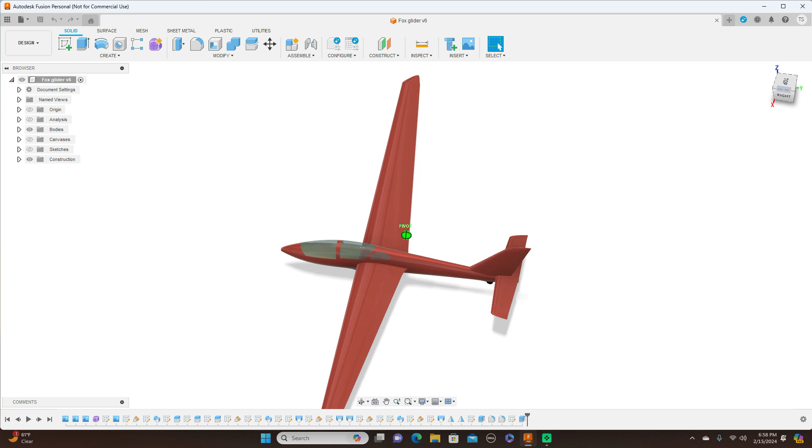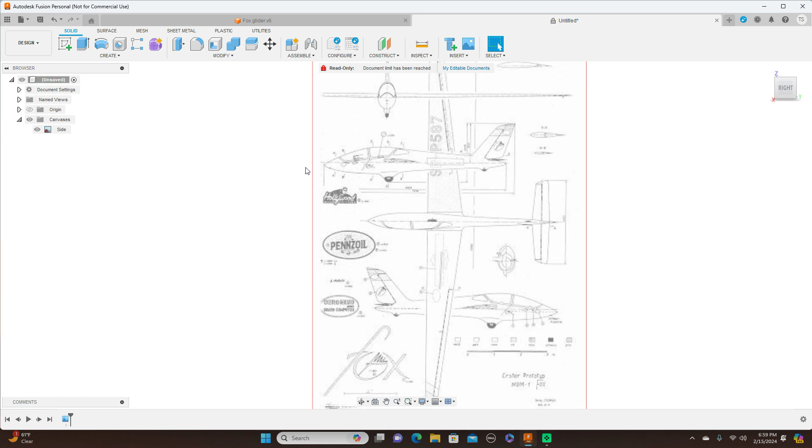And here we have it, Fox glider. Open, put it on this plane here, drag this out. And we have this. Come up here to canvases, change this to side. All right. Now I'm going to calibrate this, the side view. I want from here to here 2 meters. So we'll click here and click this line and type in 2000.

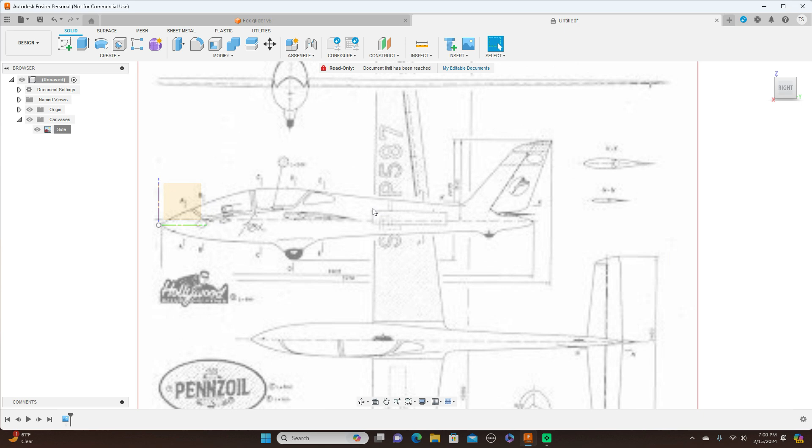Scroll in. Now I need to line this up with the origin. Turn on origin, left click, then right click, and edit canvas. And OK. Do the same thing and insert a top. So canvas.

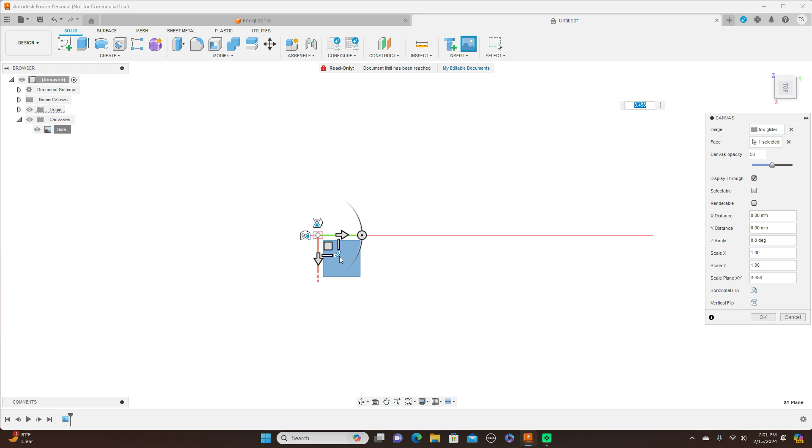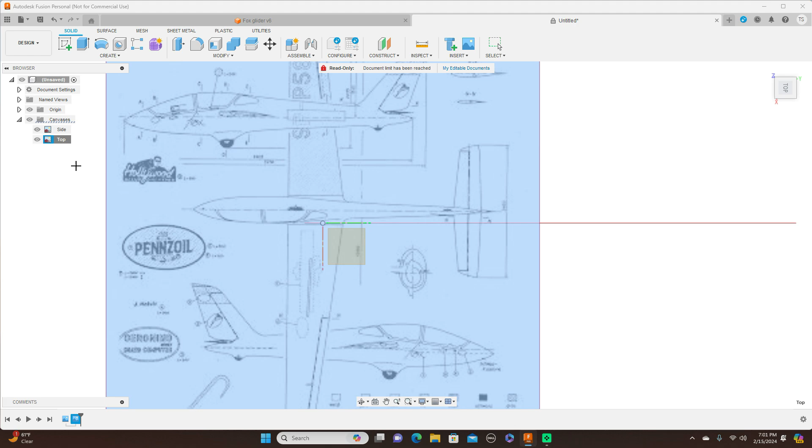Now I want to put this on this plane. Drag this out. And rotate this 90 degrees. And OK. And change this to top. Left click, then right click. I want to calibrate this. And same thing on this. From here to here, 2000 millimeters. Then we need to edit canvas and move this back.

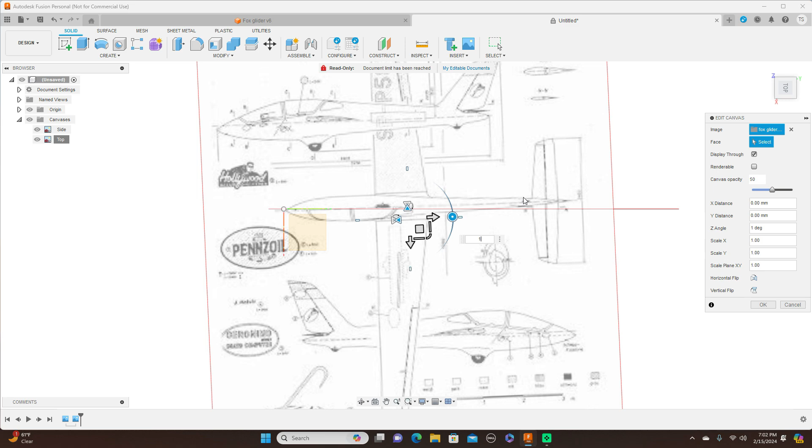Now this is slightly off here, rotation. So I'm going to add just 1 degree. Still slightly off. So let's add 1/2 degree. Well, still not right, but I'll get it here in a second. Okay, that's better. And click OK.

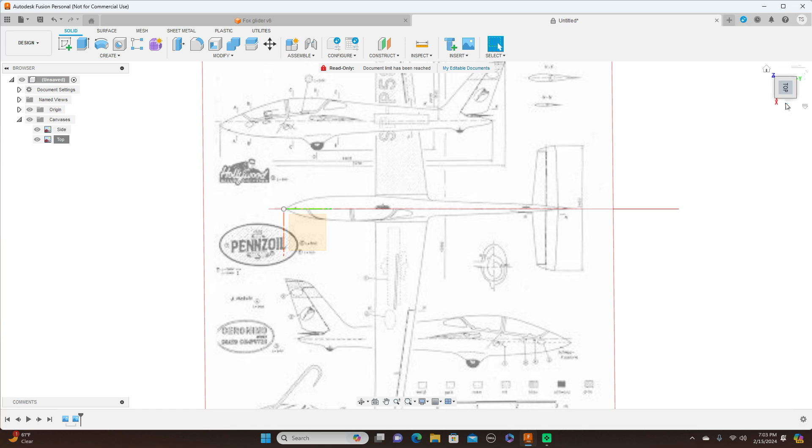Now we have the side and the top. Now we need a front view. Same thing, come over to Insert, Canvas. Open this. And we want this on the front. Drag this out. Now this is facing the wrong way, so I'm just going to hit this button right here. And click OK. Again, we want this front down here, but first need to calibrate this to the correct size.

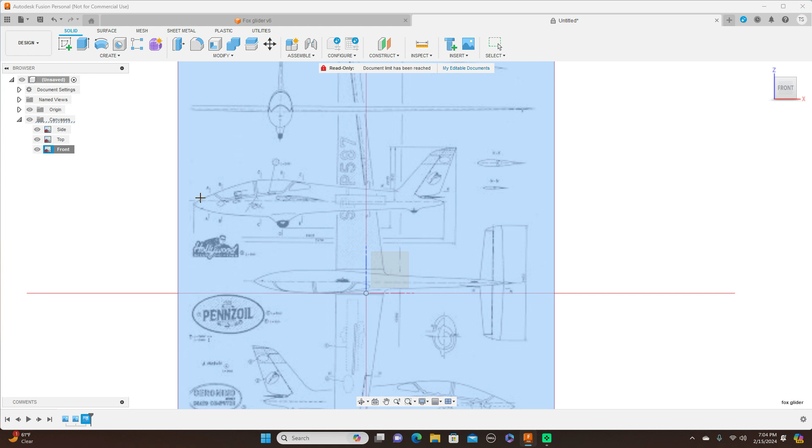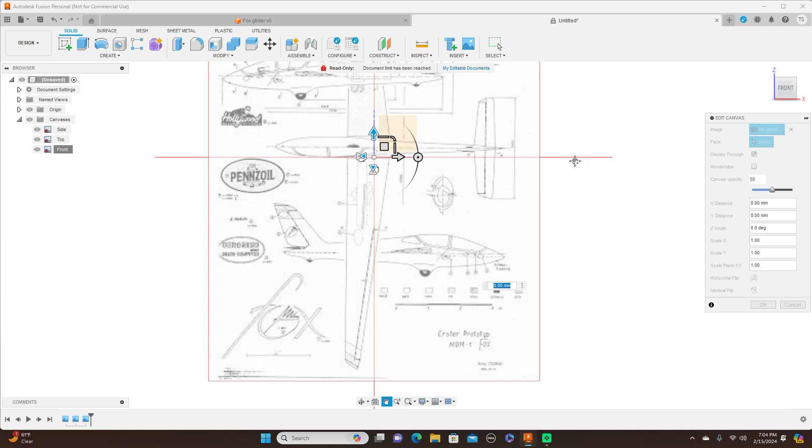So this here, change this to front. Right click on it and calibrate. And again, here, 2000. Or you can add whatever length you want yours to be. Now, right click on that and edit canvas. And move this down to here. Click OK.

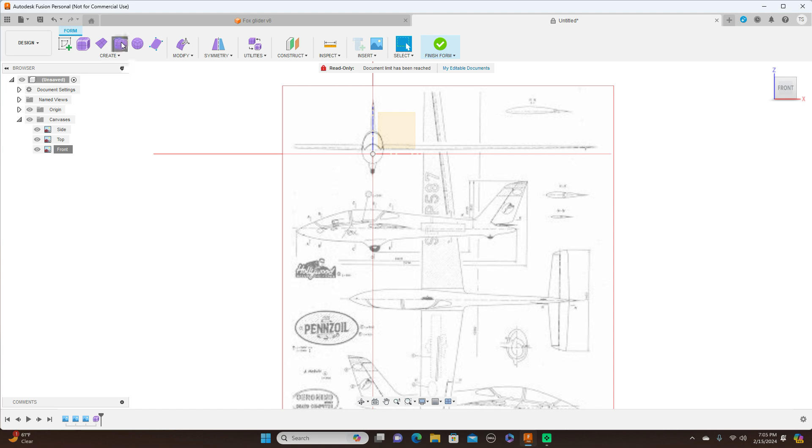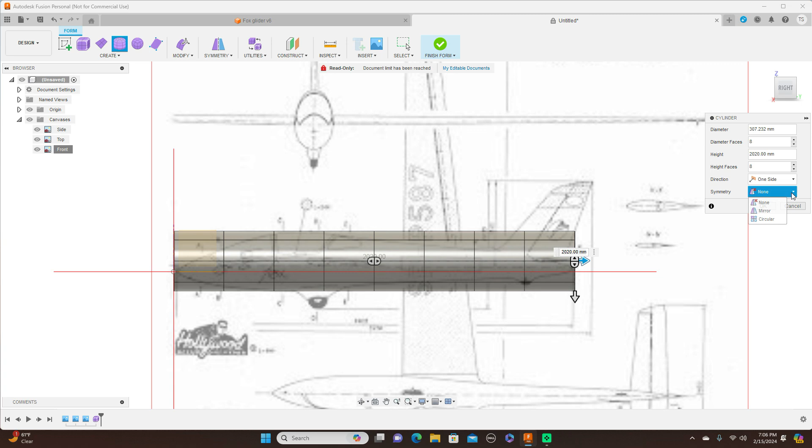Come up here to create form. Click this. And we want a cylinder. And we want this on this plane here. Drag this all the way back. Add height faces. Going with 8. And I'm going to mirror this with symmetry and click OK.

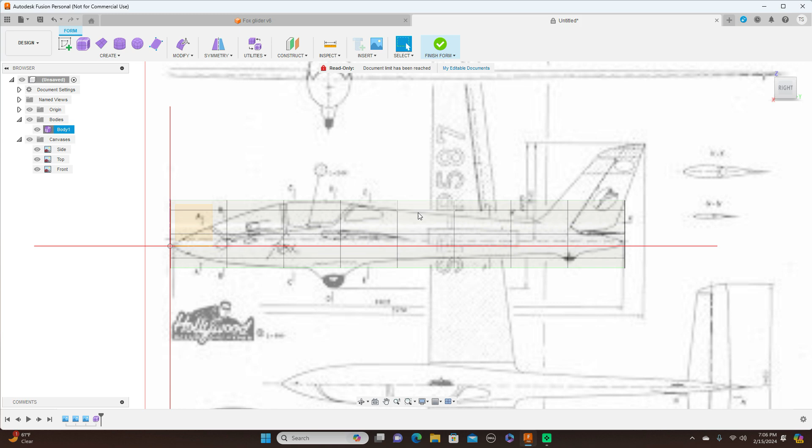Now it's hard to see through this, so what I'm going to do here, right click and the opacity control, move this down to 50%. Now we can see through there much better. I'm just scaling these down to these 2 lines here. Bring the opacity up a little. Go ahead and finish this.

And come back down here, right click and edit. And continue.

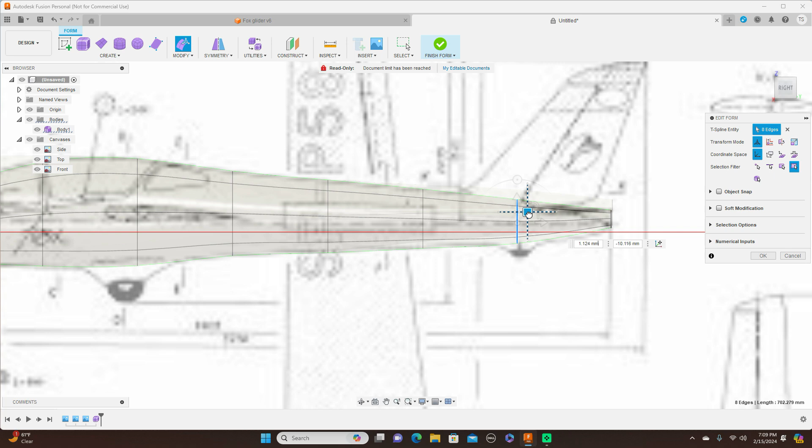Make this bigger. Drag this down. And drag this down too. Bring that down. Now over the top.

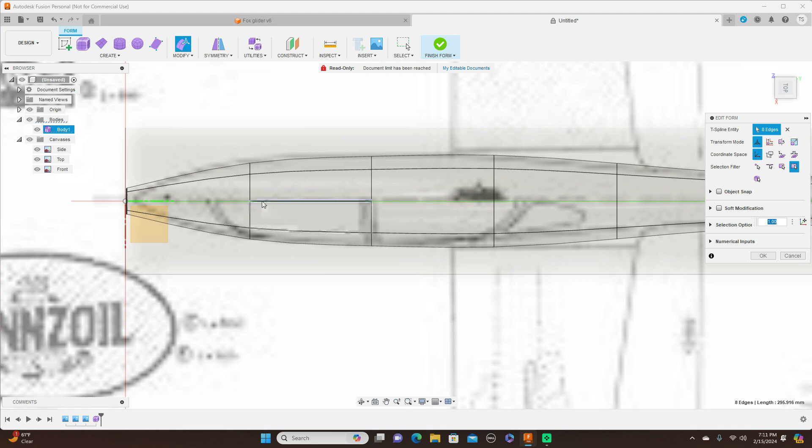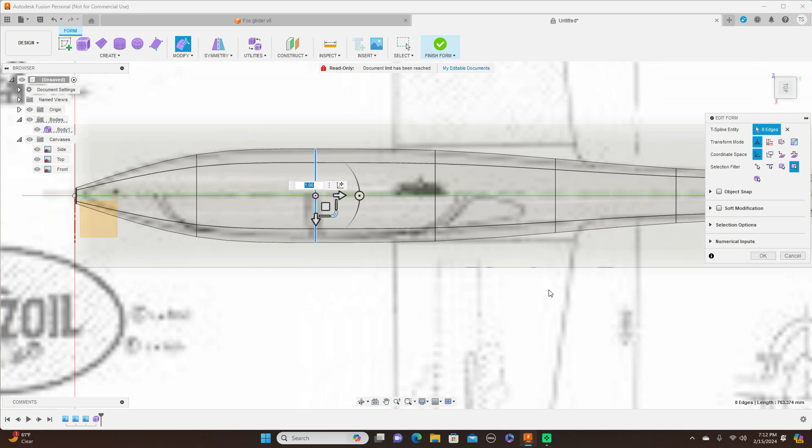And this is looking pretty good so far. Side view, let's take a look at the front. And this is matching up pretty well. And click OK. Finish form. And let's see what we have so far.

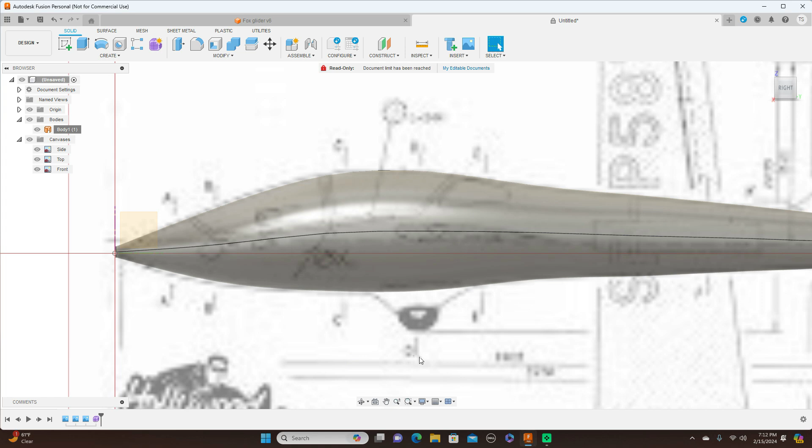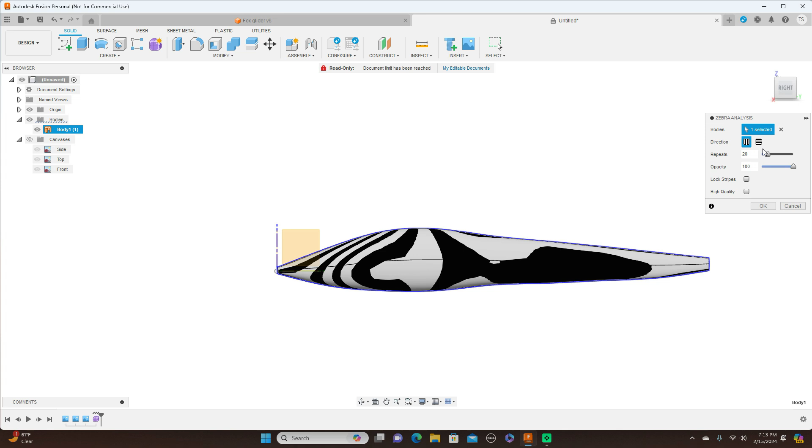And bring the opacity level back up to 100%. Turn the canvases off. Okay, here's our shape. And it's got, looks like some lumps in here. Let's see here. So thick here. Okay. Right through here, so that's a little thick.

Turn this off and correct this.

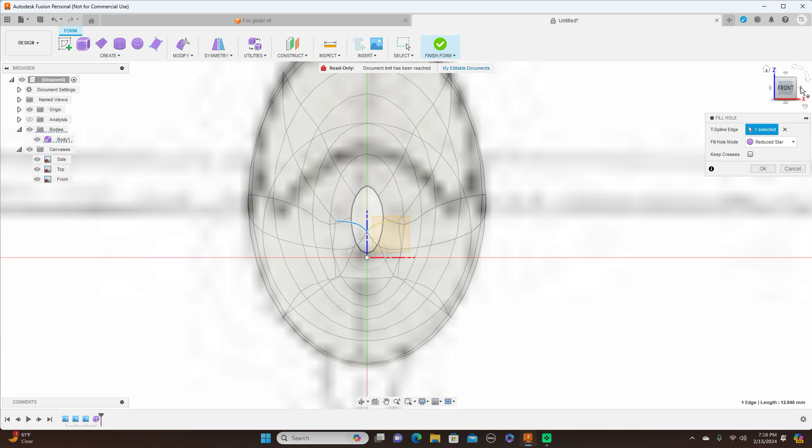Okay. Finish form. And that's our fuselage. Let me do something here. Come back down here, right click, edit. And what I want to do is close this nose up here. So I come up here to modify, fill hole. Double click that. See what it looks from the side. And there we have that. And click OK.

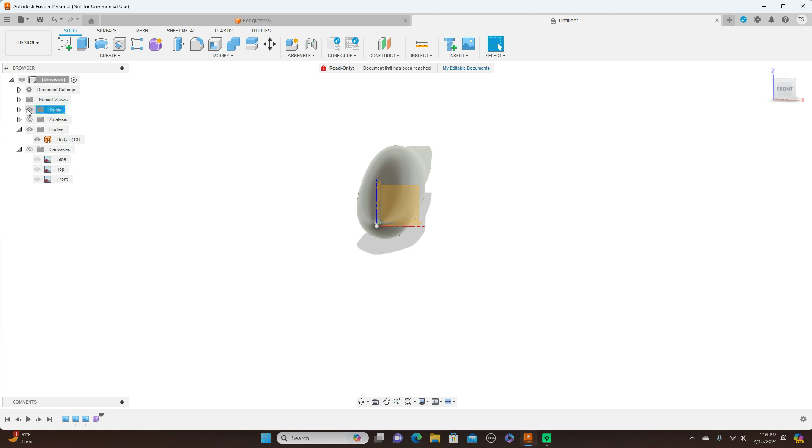Go ahead and finish form. Turn the lines off. And turn the canvases off. And there's our fuselage.

Okay, now we're going to make this section right here down here. So, turn my lines back on. Edit this. And I want to add a line. Come up here to modify, insert edge. I want to move that to right there. Come over here, exact, and OK. And I'm going to add another 2 lines.

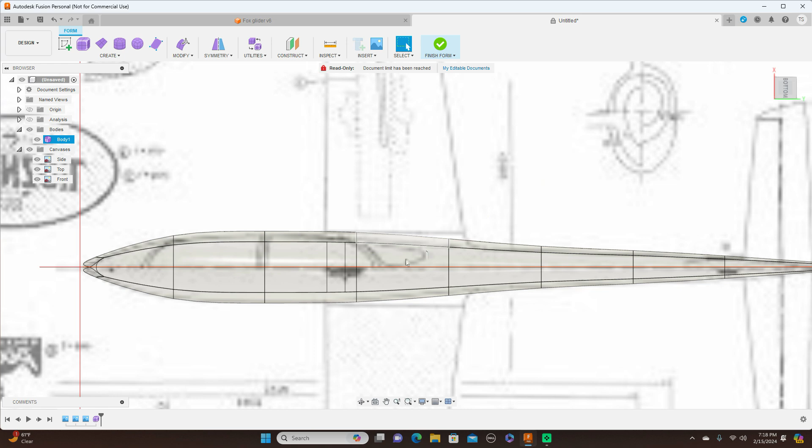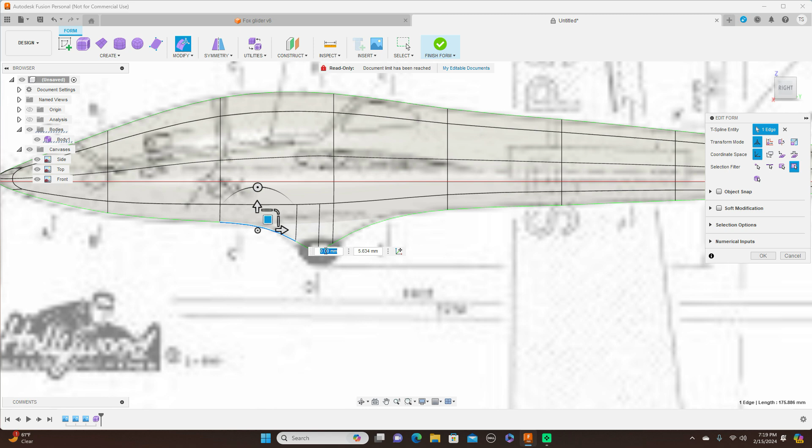Right about there. Click OK. Pull this down. Click OK. This point here. Move this back up. This down. And move this up. OK. Click OK. Finish form. You turn off the canvas. And there we have that.

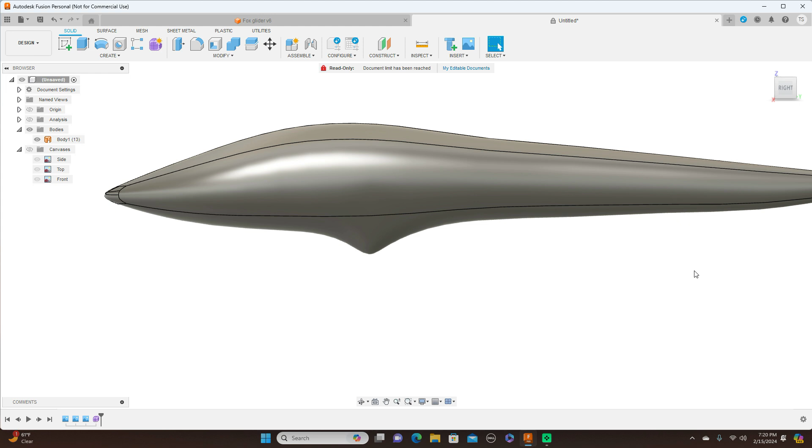Now I'm going through this pretty quick because this is not a hard airplane to model, but I wanted to do this before I get into any more complicated stuff that I'm going to show on my channel, so that you guys can practice doing this simple stuff and getting the forms correct and everything.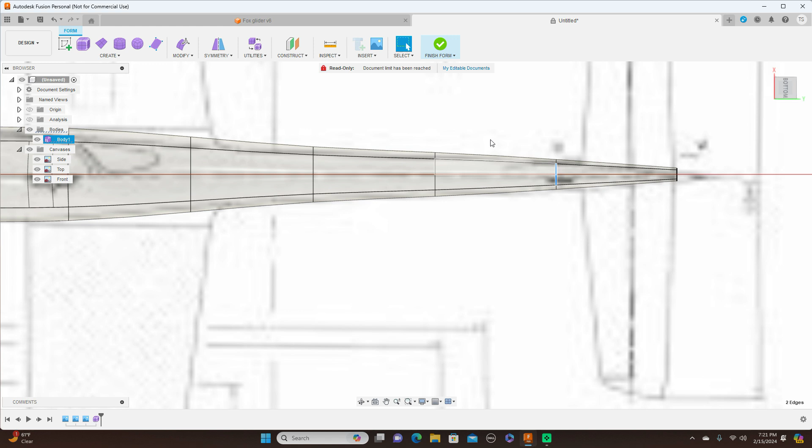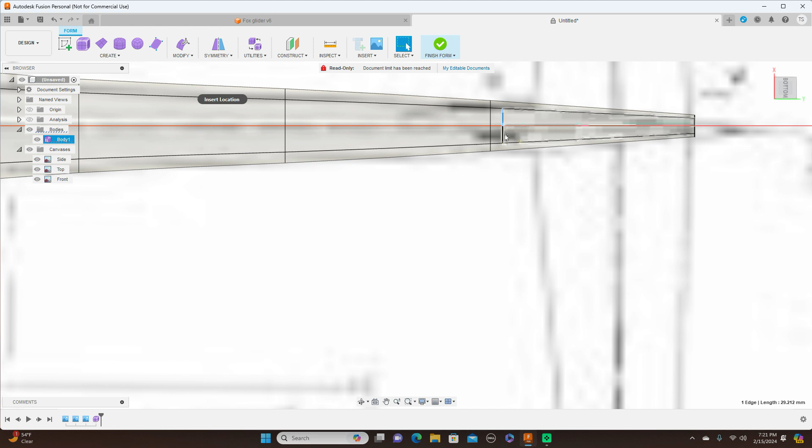Now I'll need to do the one in the back here too. And come back here. Edit. Do the same thing. I'm going to add a line. Or insert an edge. About right there. And add another one in the behind here. Click OK.

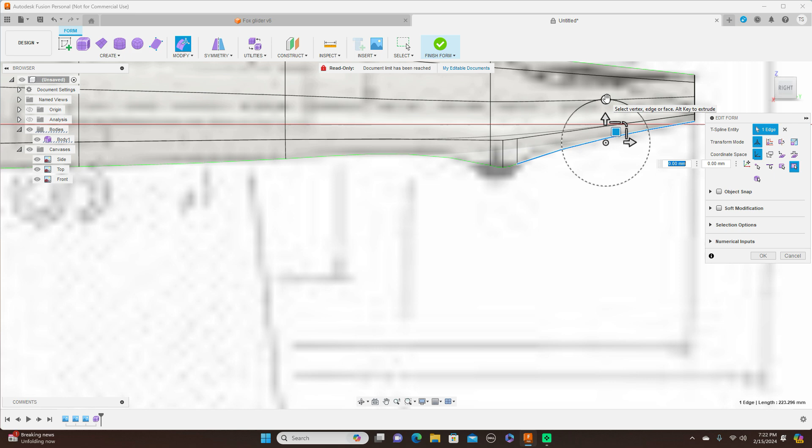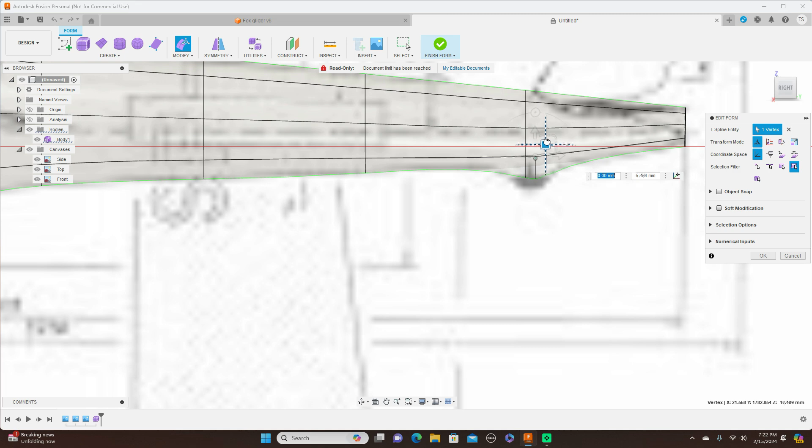Click this point, edit form, and pull this down. Rotate this, then move this up, move this up, rotate this a little, move it up, okay, that's it. But I'll move this up. And finish form. And there we have that.

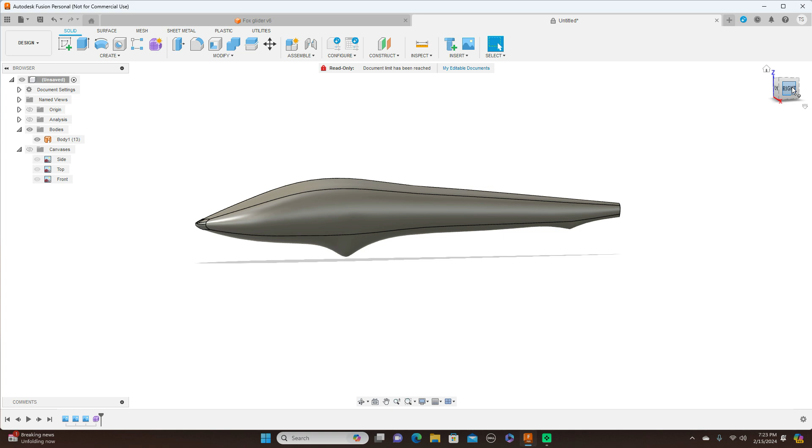Pretty simple to do. Cut the canvases off. And there's our fuselage. Looks really good now. As you see, we got rid of the lumps to straighten these out more.

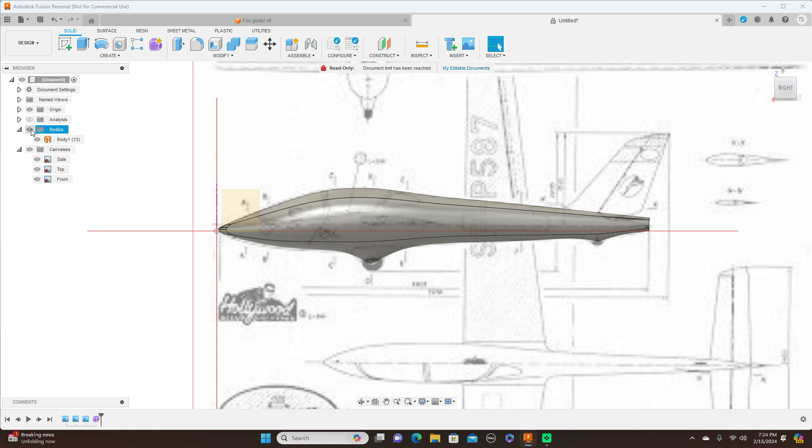All right, let's go ahead and put a wing in here now. What I did, I downloaded an airfoil for a glider, which this is, and I'm going to go ahead and put that in now. So let's see. First, I need to draw a line, so I'm going to turn this body off, and I'm going to draw on this plane here.

Create sketch. L for line. And about from here, here, and click OK. Look at this from the top. Now, since this has a little radius here, this needs to come back a little. So I can match that radius from here. And finish sketch.

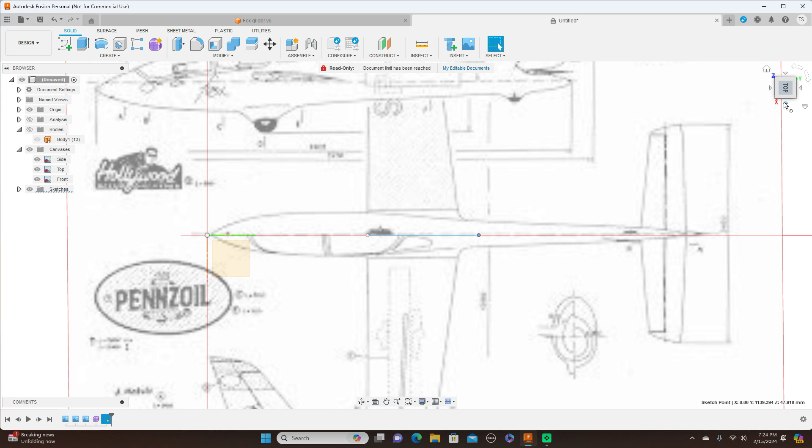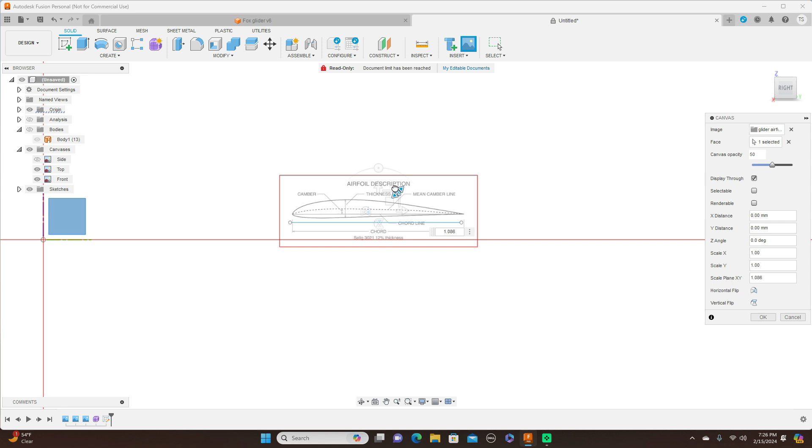All right, now come up here to insert, canvas, and I'm looking for a glider airfoil. Glider airfoil, here it is. Open, I want this plane here. And I want to drag this back here. I can turn off the canvases right now, or the side view canvas. And as you see, this is a Selig 3021 airfoil. And I'm just going to match this to here and here to here. And click OK.

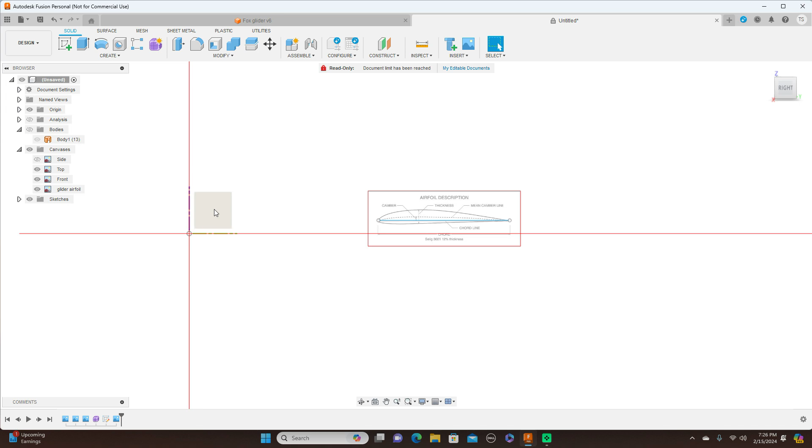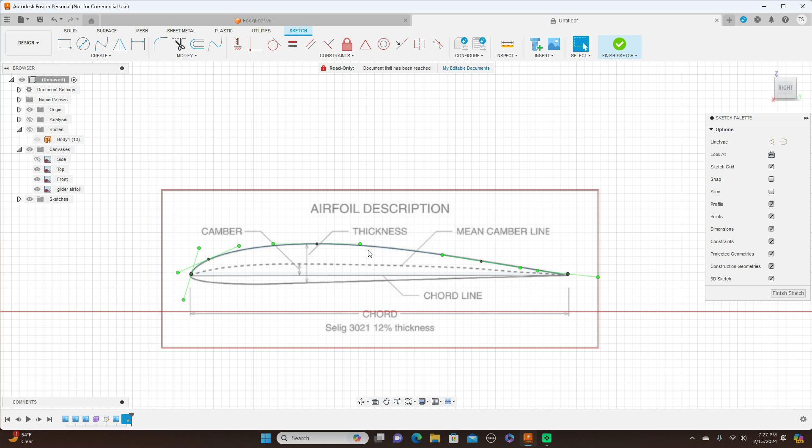Now I'm going to trace this airfoil, so I want to click this plane, create sketch. Fit point spline here, or here, about right there. Click OK. Drag the handles around. I'm going to put another point in here. Let me get rid of this. All right, there we go.

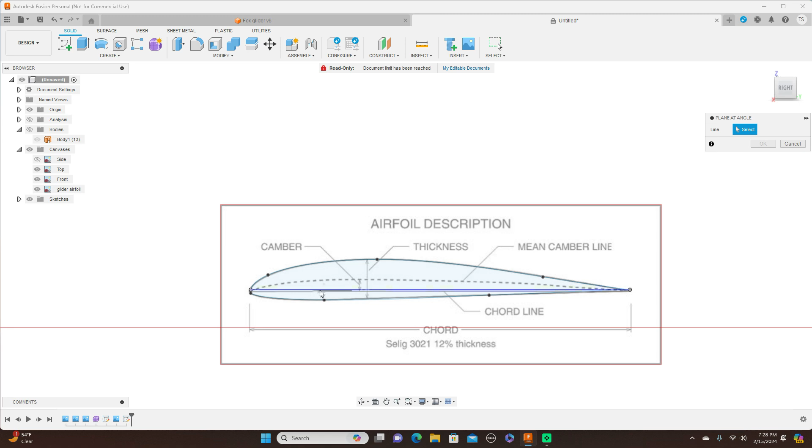Now I'll put a line here to here and draw the bottom of this. And finish sketch. Come up here to construct, do a plane at an angle on this line. It should be 0 degrees and click OK. Next, we want to draw on this plane here, or sketch on this plane. Here.

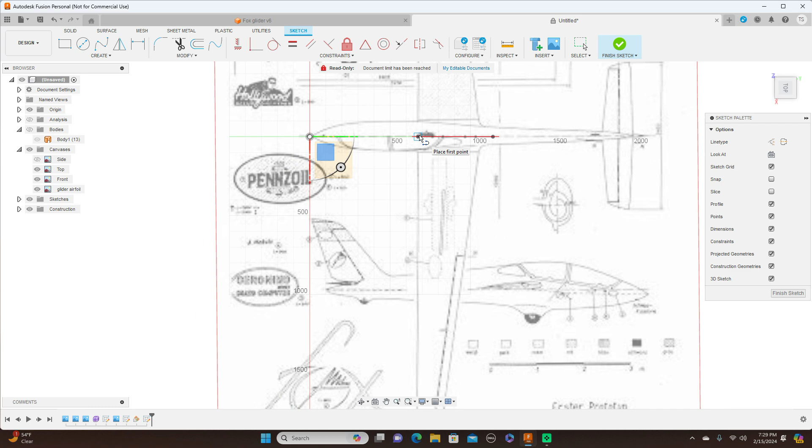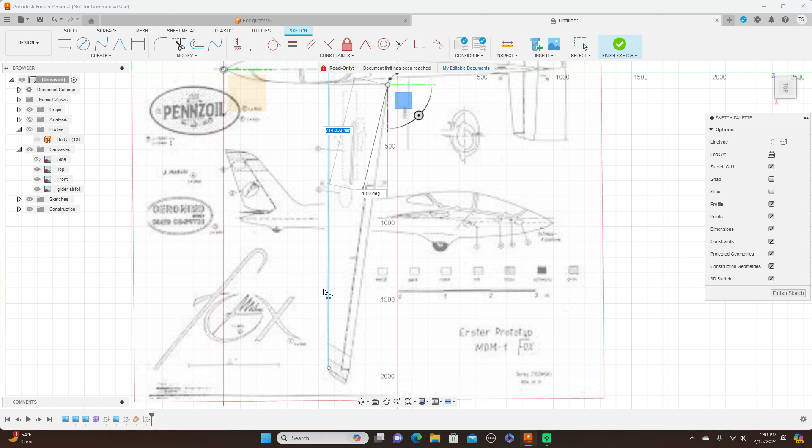From here to about right here. Next, fit point spline. And a line here to there. Finish sketch.

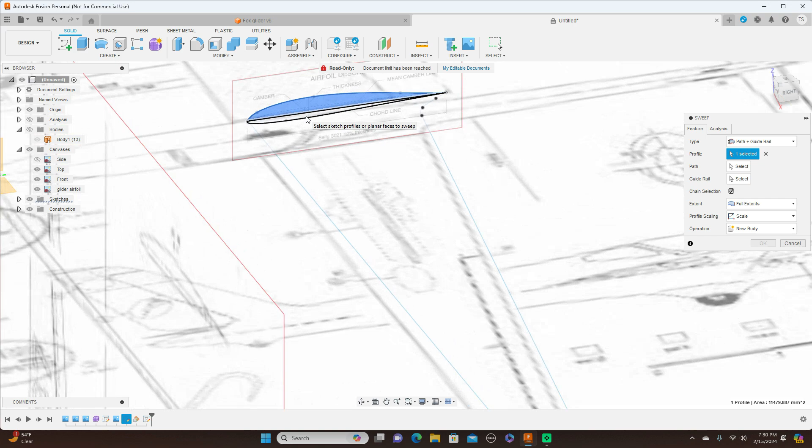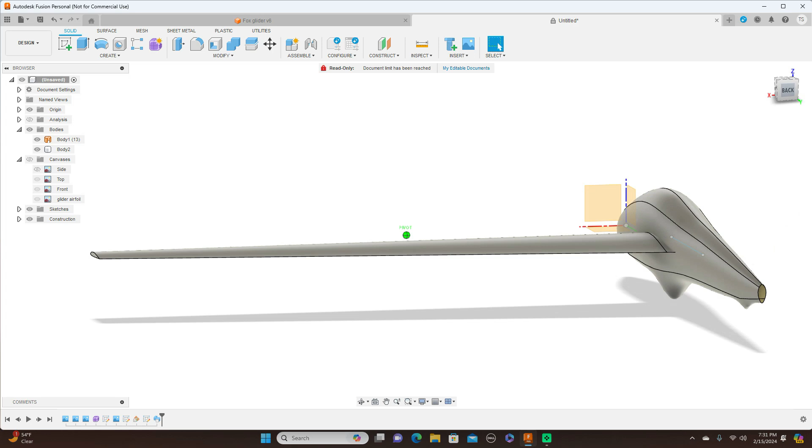Come up here for create. Then we want to use a sweep. Change this to path and guide rail and full extents. I'm going to select this profile and this profile. So path, guide rail, and click OK. Turn the bodies on and turn the canvases off, and we have our wing here. It's looking pretty good.

Okay, now we want to draw on this right here. Click this, create sketch. Letter P for project, and we want to project this. Click OK. Going to draw a line from here to here.

Computer was acting wonky there, but it's okay now.

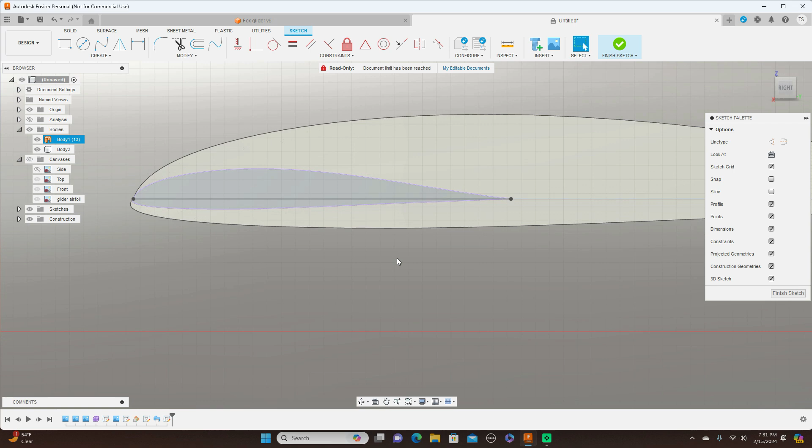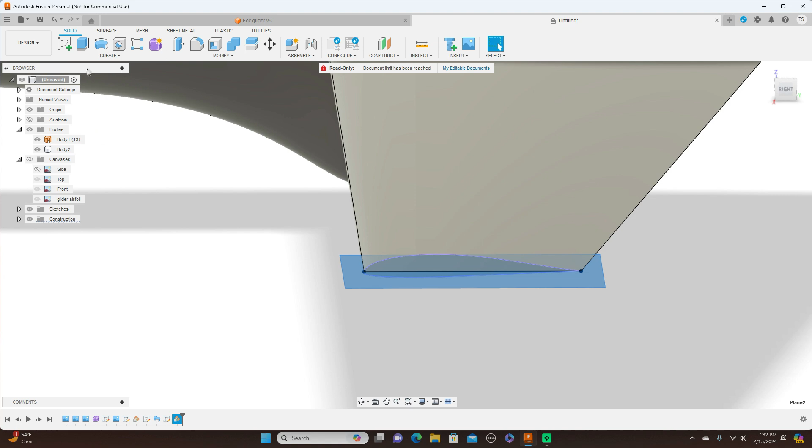Finish sketch, construct, plane at an angle, and this is what we're going to use, and click OK. We want to sketch on this plane here. Turn the canvases back on. Fit point spline.

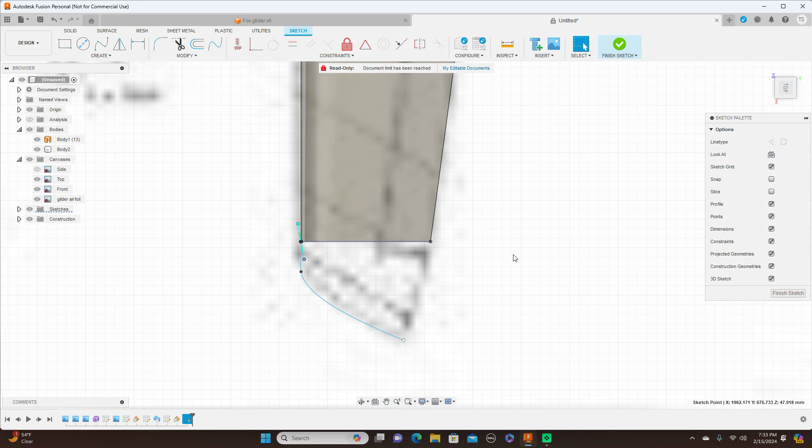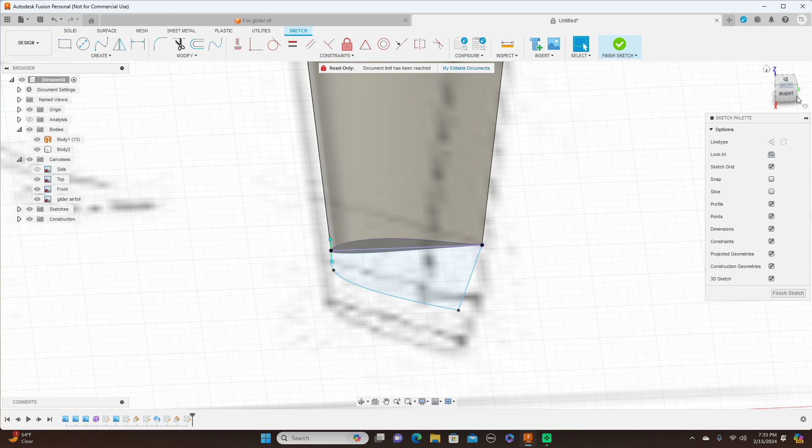We want to project this line here and click OK. Finish sketch. Come over here to loft. Click this, this, and this.

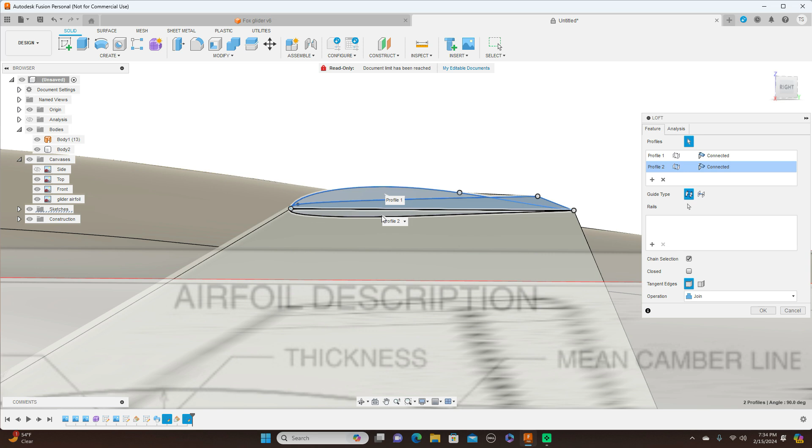And it looks like Fusion may be crashing on me here. Okay, since I didn't save that, it disappeared. So Fusion did crash on me, no big deal. And so up to that point, I was showing you how to just put this tip on here. So that's what I was doing. And if you follow what I was showing you all the way up to then, you should have this wing tip over here.

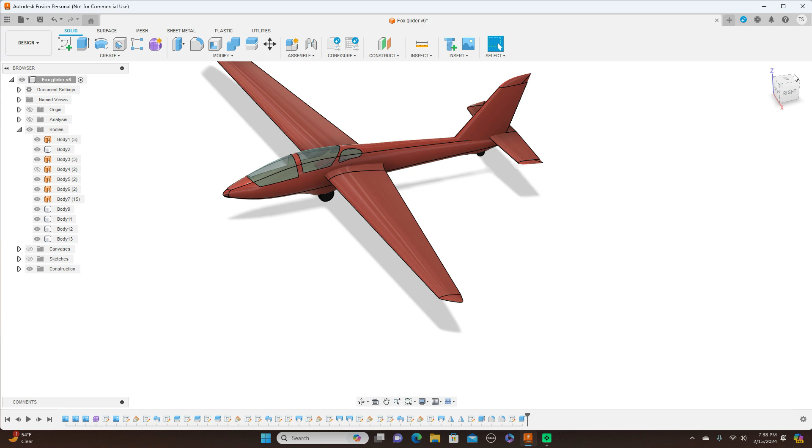And once you have that wing tip on here and you have your wings here, you'll have one wing, and you just come up here to create, and you click on mirror. Then you click this wing here, and then your origin. It'll ask you for the mirror line, and then you can use this plane right here for the mirror line, and that'll give you the other wing over there.

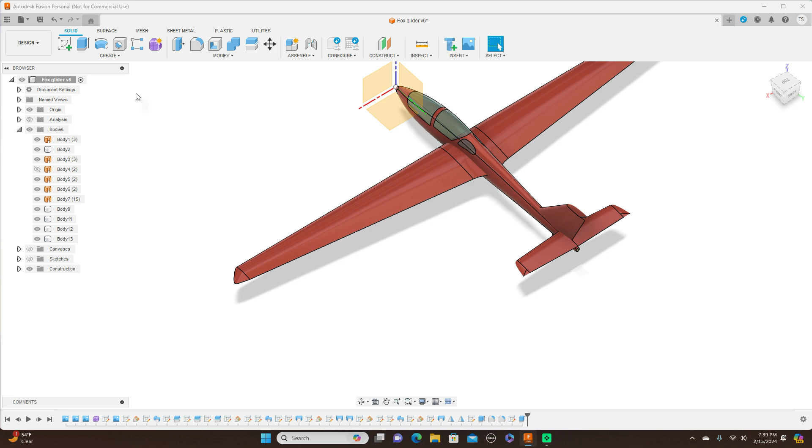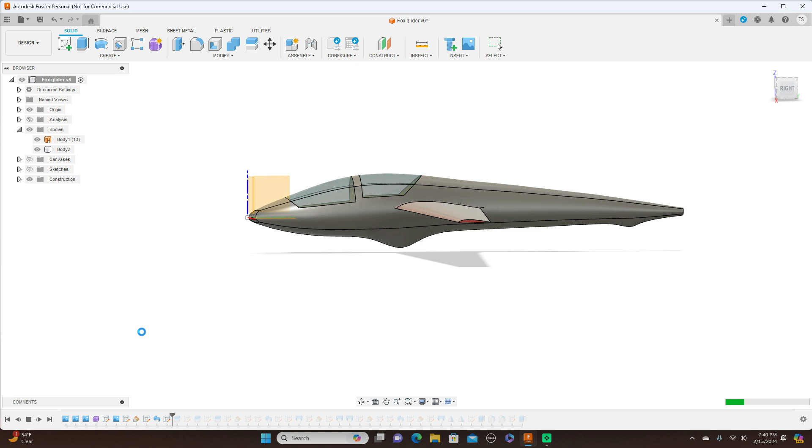And also here, what I've done... Let's go back here. Okay. Now, if I play this, you can see everything I've done. Up to that point there. Move this back out. Let's take a look at that again. The plane's form. Okay.

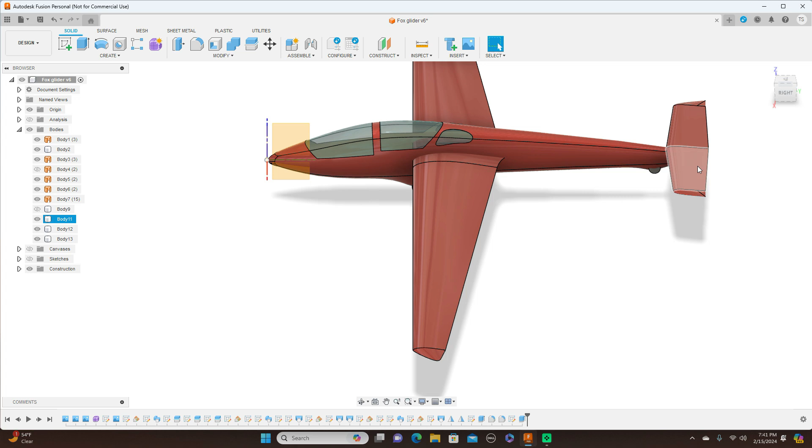And now that you should have the wing there, what I'm going to do now is show you how to draw this, the vertical stab. I'll turn this vertical stab off over here. And I'll turn off this. Turn the canvas back on.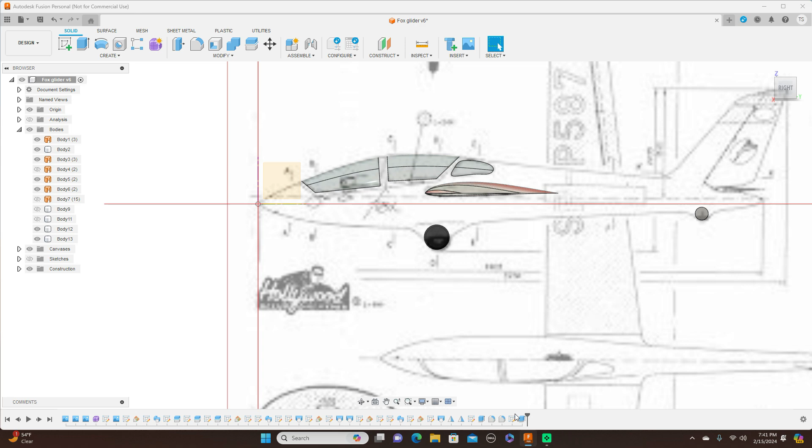Well, actually, I'm going to show you how to do this first because this looks better by having these up here. What you do, you'll create a sketch on this plane here. So click this plane here, create sketch. Then you'll use your line tool. Insert your line and go all around this with the line.

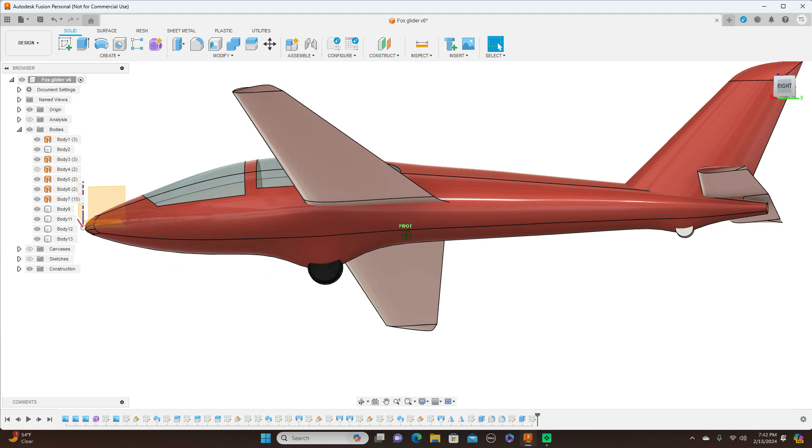Well, you know what? Since this is just a short plane to draw, what I'm going to do is just go back and draw everything again and make another video showing you guys how to do the rest of this airplane with the wing tips, the horizontal stab and the vertical stab and the wheel, how to cut the windows in this. So let me turn this stuff back on. And for now, this is just it. But yeah, so my next video, I'll just go ahead and finish this plane up, show you guys how to finish the rest of it.

But for those of you who don't want to wait, this horizontal stab back here is done the same way that I drew this wing here, same way. And this vertical stab here is also done the same way, except the shape of it is just done on this plane here. So yeah, my next video for this would be out in a day, probably Sunday or Monday, and I'll finish showing you guys how to do this. But it's not difficult. Like I said, for you guys who want to just do it on your own, go ahead and do it on your own.

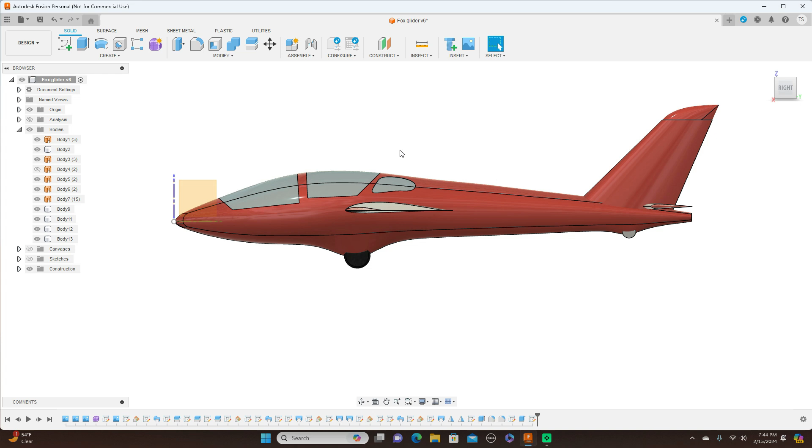And if you want to work on these windows, just create a sketch on this plane here, the center plane, and then just trace those lines out from the canvas. Then you'll come up here to modify, and then you'll use the split body tool. And then you'll select the main body to split here. And your splitting tool will be the lines that you just drew in there, and then you just click OK. And then these will be all split. And then you can go back and change each one of these to glass so you can see through it like this. But yeah, it's a good looking plane.

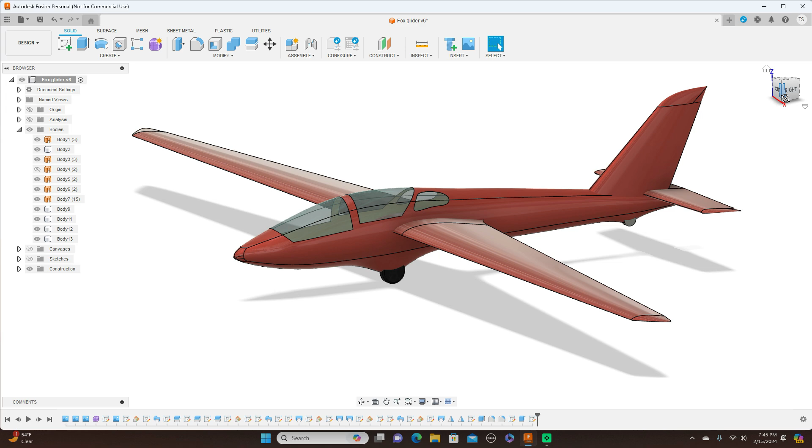So again, I'll do another video, and I apologize for not finishing this up for you in one shot, which I had planned to. But unfortunately, I didn't have any room on my computer to save what I was showing you guys how to do. So when my computer crashed, it went away. But I have this here, the model that I did earlier.